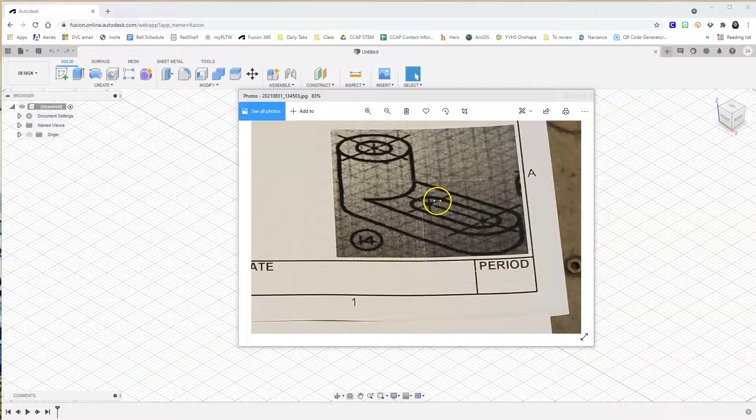In this Fusion 360 tutorial, we will be drawing this figure.

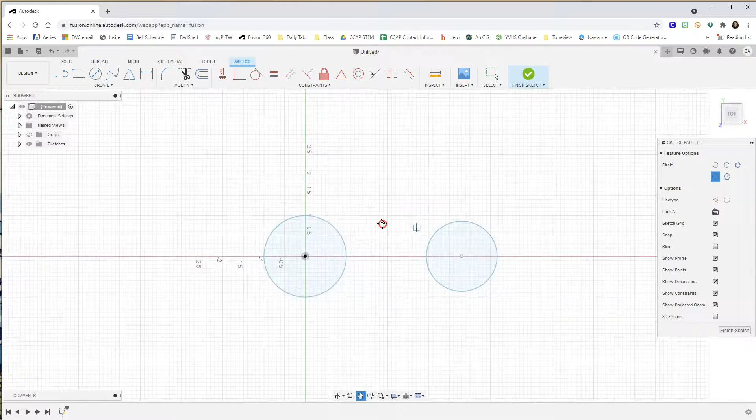Create sketch, and let's create the sketch from the bottom plane. Then do a center point circle from the origin. Draw one circle, and then right across it, draw another circle. Doesn't matter what the dimensions are, we are going to dimension it next. This circle should be 4 inches, and this other circle should also be 4 inches in diameter.

Next, we need to dimension the centers of the circles. From one center, click to the other center of the circle, and then type 8 inches, so they should be 8 inches apart. Then where the constraints are, choose horizontal, vertical. Click on the center of this first circle, and then click on the center of the other circle to constrain them.

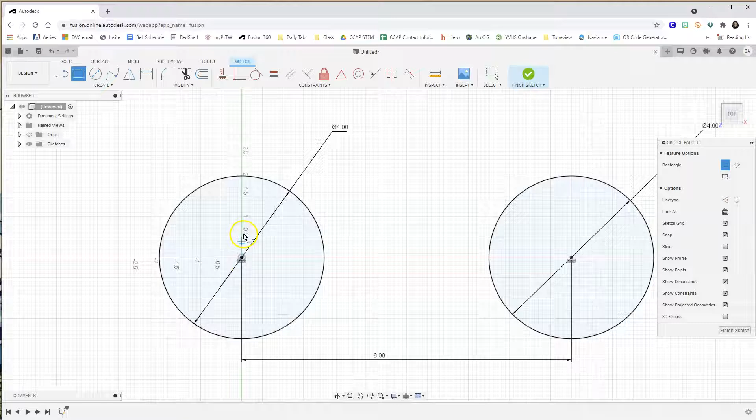Now choose 2-point rectangle. I will move my cursor in the middle of the first circle and slowly move it up so I could get the center of that, so I could get like this part of my first circle. Then I go through the center point of the second circle, not clicking anything, but just moving down straight and then click. The lines of this rectangle are still blue, which means we need to dimension it.

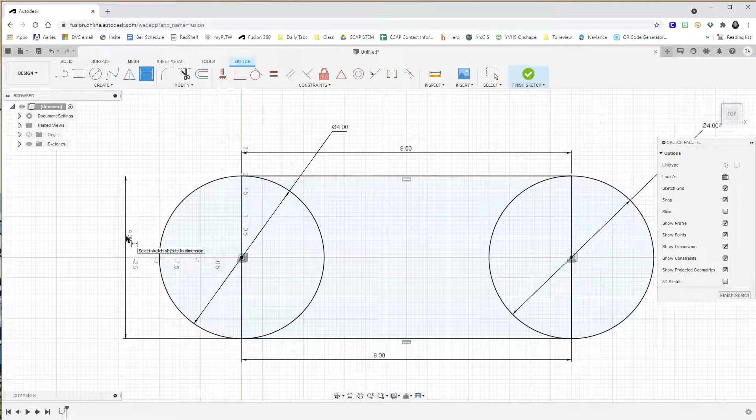So the first one, this top line should be 8, and this vertical line should be 4. Now all our lines are constrained.

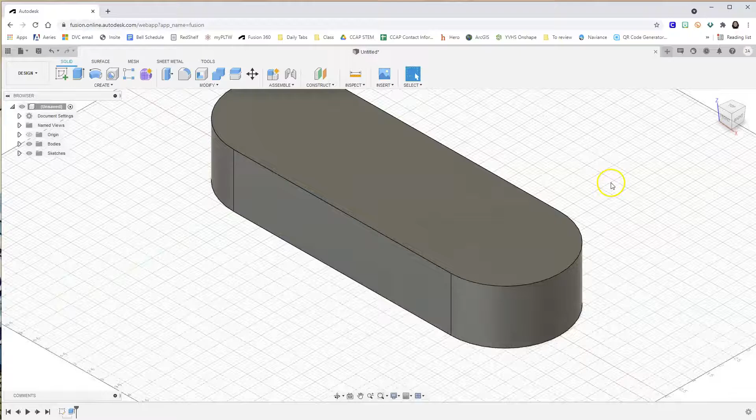So finish my sketch, and then click on that house, and then let's press pull. Click on all the enclosed shapes, and then drag up to 2 inches. Type 2, press enter. So the first part of my drawing is done.

I now need to do another sketch on the top view of this body. I will choose center diameter circle, and I will draw 2 circles. First one, I'll have to line it up here where the center of my first circle was made. So I'll draw one circle here, and I'll draw another circle right about here.

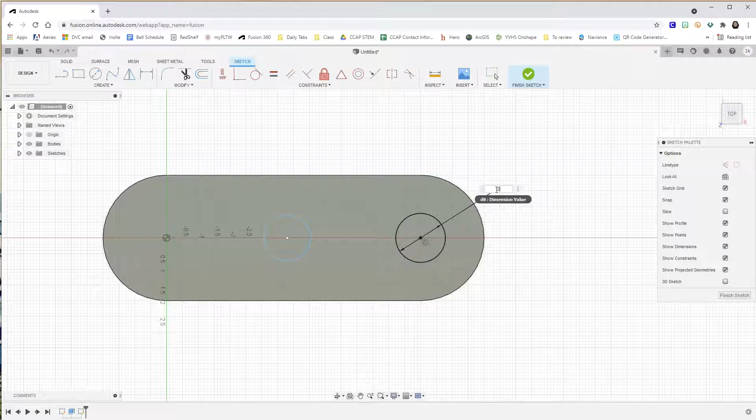Let's dimension the circle. This circle should be 2 inches in diameter. As you can see, it's now colored black. The line's colored black because I started at the center point of this arc right here. Then I'll dimension this one 2 inches as well, but you'll see the line won't turn black, not just yet.

What we're going to do is dimension between the centers of the 2 circles, that center and then this center, and then pull down. This should be 4 inches, and then press enter.

Still, it's not fully constrained. So the next thing I can do is horizontal vertical again. I could click here at the center of this circle and then the center of this circle, and as you can see now, it's fully constrained.

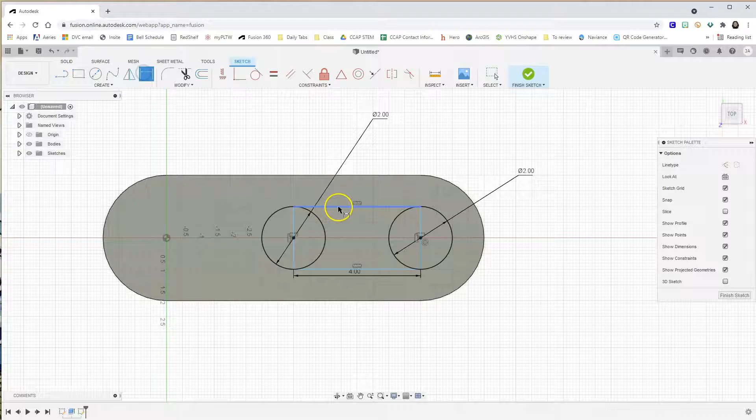I'll choose 2-point rectangle, and I'll do what we did in the previous step. Try to get that part of the first circle, move to the center of the second circle, and then just pull down. Dimension this, this should be 4, and then this here should be 2 inches.

Now I could finish the sketch since all of the lines are now in black. Then I could go click press pull. This time I'm pushing downwards, so it's a negative sign, -2.

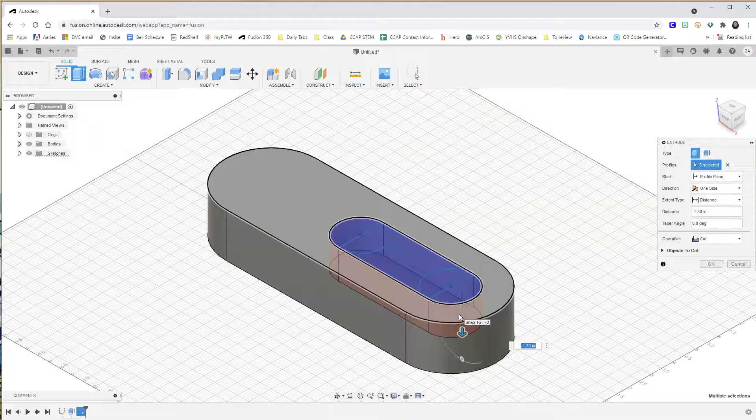Here's how my figure looks like right now. I'm almost done, I just need to draw another figure here at the top view. Choose center diameter circle, and you could actually see the origin right here.

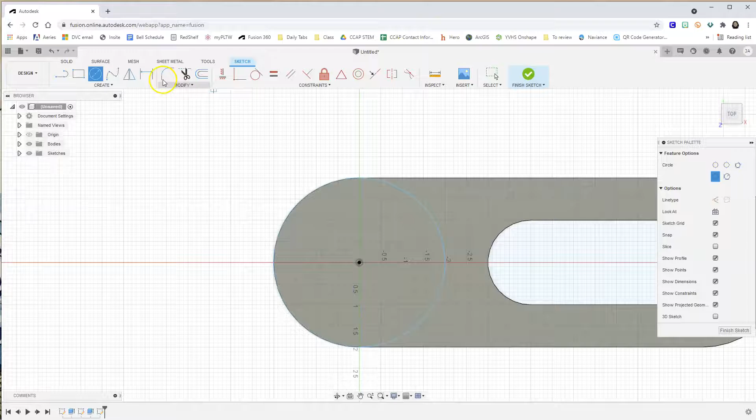So I'm just going to start drawing a circle from there going out like that. Okay, but it's not fully constrained, so we could go ahead and just click here and say 4 inches, and now it's fully constrained. So I finished the sketch.

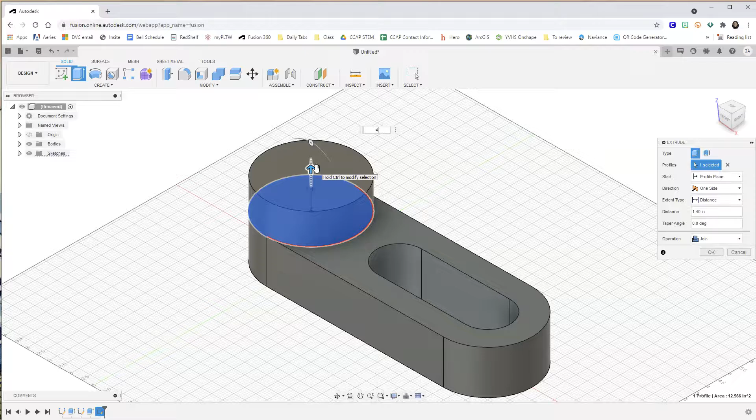Press pull on this circle, and we want this to go up by 4. Let's see, 1, 2, 3, yeah, 4. Type 4, enter. Okay, last thing.

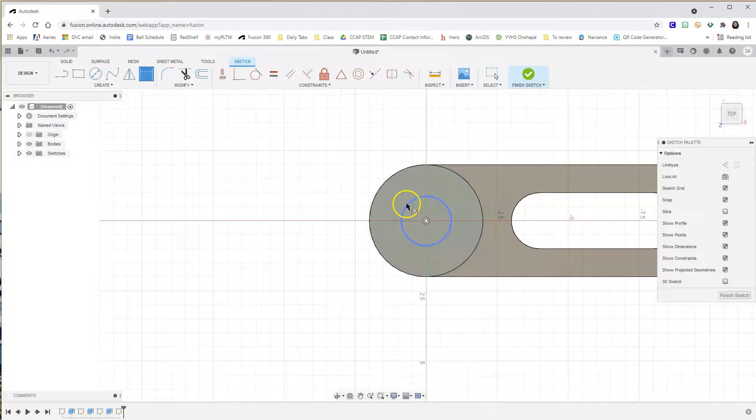Draw another circle on top of this. Let me do that again. Click, there you go. Select circle, and this circle should be just 2 inches. Click, drag, 2 inches. Finish my sketch, and then use press pull again to push downwards for 6 inches, -6 inches.

And there you go, this one is fully done.